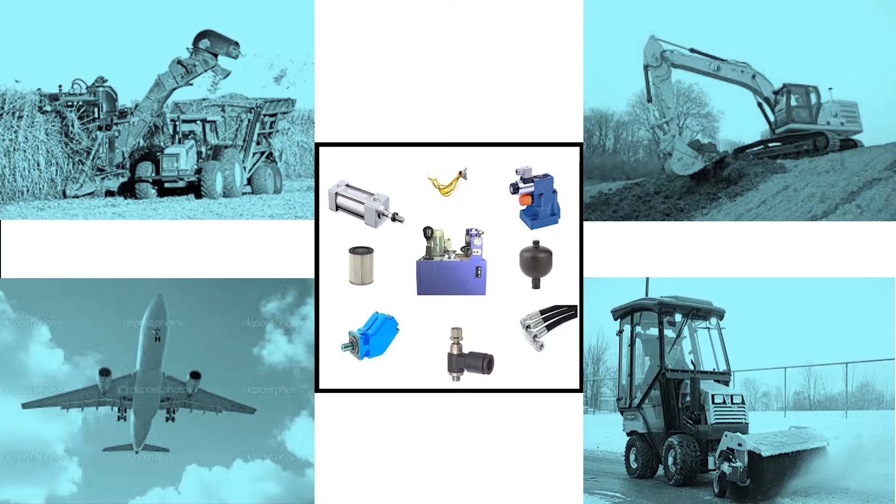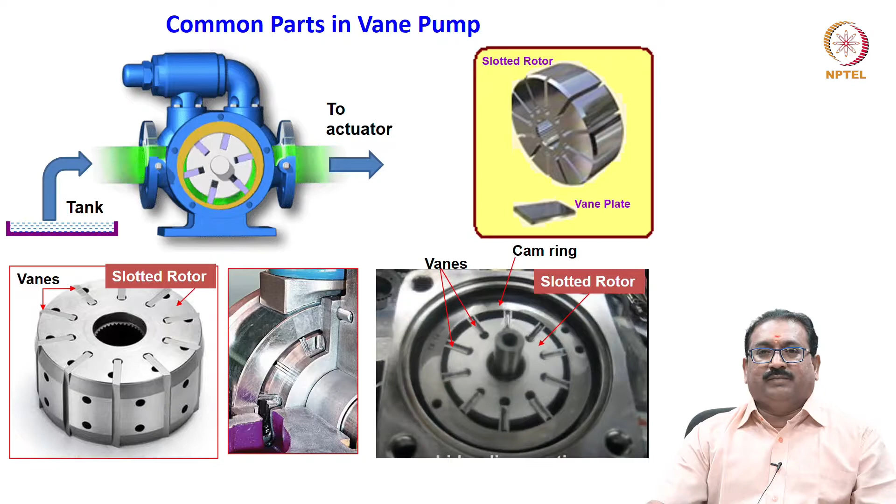What are the three important parts? Slotted rotor, vanes and cam ring. These are the important parts in the vane pump. Let us see one by one.

Variable displacement, unbalanced vane pump is what we are discussing now. It basically consists of a rotor which contains radial slots, splined to the drive shaft, and rotates inside a cam ring.

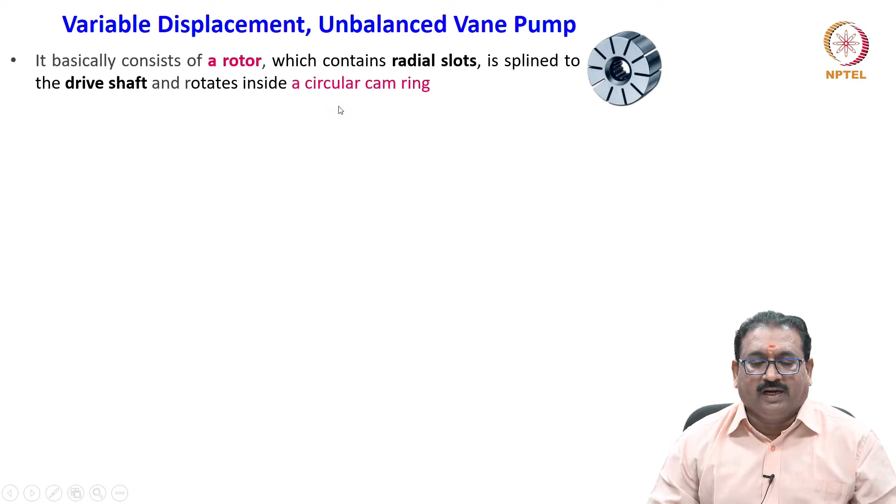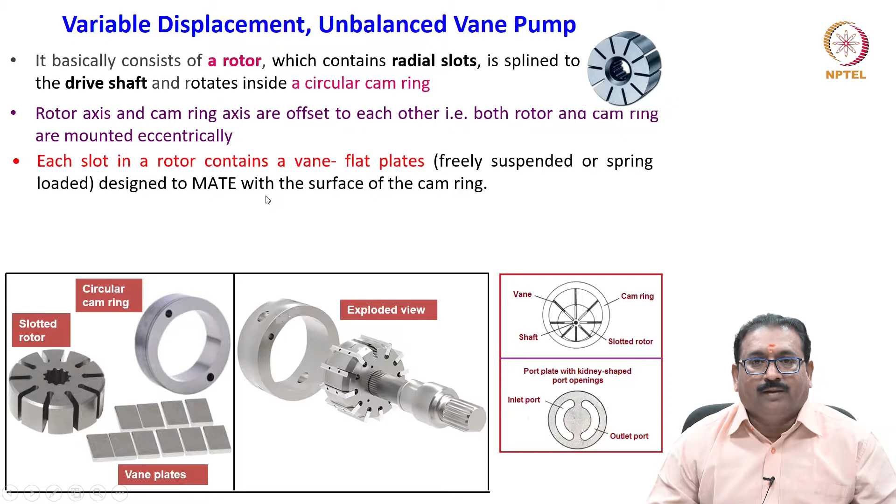Each slot in the rotor contains a vane, which are flat plates, as I have told you, either freely suspended or spring loaded. They are designed to mate with the surface of the cam ring. During operation, they will mate with the surface of the cam ring.

As the rotor rotates, the centrifugal force keeps the vanes out from the rotor slot against the surface of the circular cam ring, forming a positive seal. You will see here when the rotor starts rotating, the vanes are thrown out and they mate with the surface of the cam ring. This seals the oil, carrying it in the pockets from the suction to the discharge.

Then, when the vanes reciprocate, how does it work? You will see here the port plates. The port plate has kidney shaped port openings - this is the inlet port and this is the outlet port.

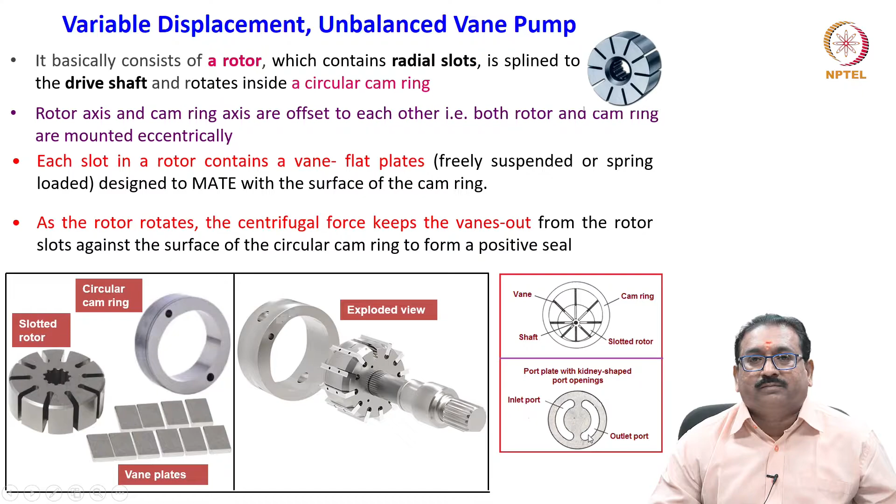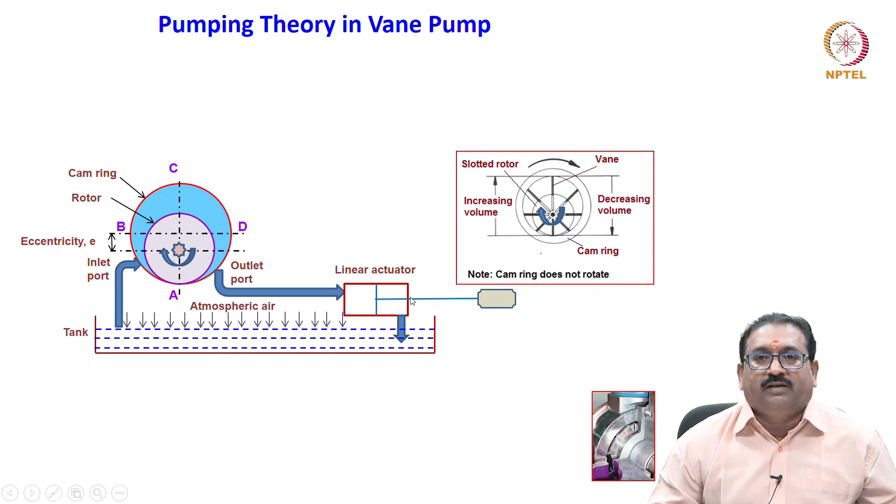Now we will see the pumping theory in a vane pump, how the fluid is transported from the tank to the actuator side. Let us see, as we know, as the rotor rotates through half a revolution, what happens?

The volume increases between the rotor and the cam ring. So the resulting volume expansion causes a reduction in pressure at the inlet of the vane pump, known as the suction pressure or vacuum pressure, which causes the fluid to flow through the inlet port and fill the void.

You will see friends here the schematic diagram. This is the rotor, rotor axis, cam ring, and cam ring axis. For better understanding of the pumping theory, I have not shown the vane here.

You will see here when the rotor rotates, the increasing volume - observe here A, B, C, this area you will see the volume increases in the half revolution of the rotor. This increasing volume creates a partial vacuum at the inlet beginning.

Once the fluid is caught, it is transported to the other side on the next half revolution. What happens? You will see in this area the volume decreasing. So, as the rotor rotates through the second half of the revolution, the surface of the cam ring pushes the vanes back into their slot and the trapped volume is reduced.

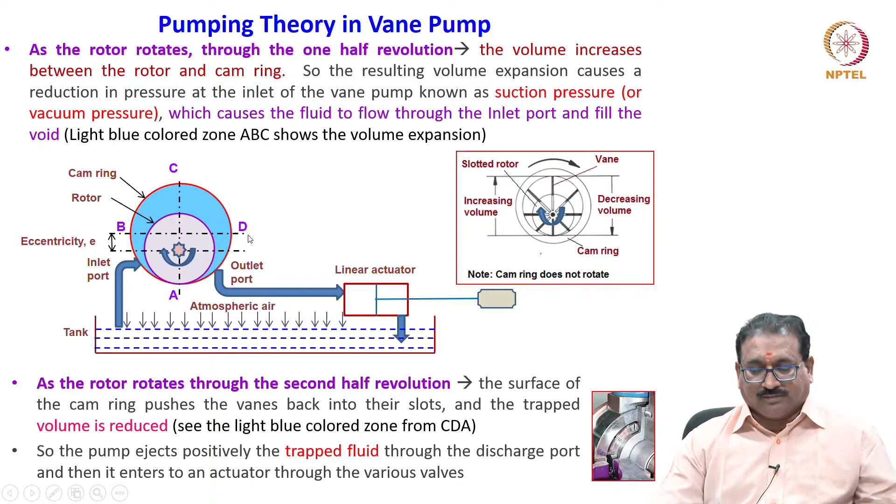Let us quickly, I will show you here, same thing. Here you will see friends, the increasing volume, that is why oil enters in this region. Then what happens? Oil is carried around the cam ring and pumping chambers, these are the chambers, what I have marked here. Also you will see friends, the vane will seal, positive seal.

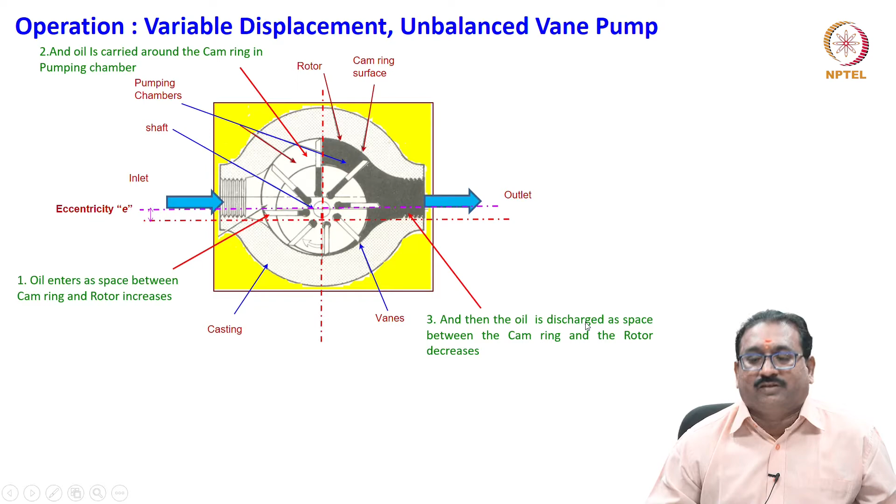Vane will throw out and it will come to the surface of the cam ring. Then oil will be carried. Then here the volume decreases. What happens? Then the fluid is discharged from the port, the inlet port, outlet port.

When this eccentricity, what I have shown here, is 0, then what happens friends? No increasing volume, then only it will recirculate, no discharge you will get. That's why when eccentricity is 0, the oil will simply recirculate without affecting any discharge.

But as the eccentricity increases, the flow also increases. Please note, the direction of flow is determined by the direction of eccentricity. I will explain this in the next slide.

You will see here friends, when the rotor axis and cam ring axis coincide with each other, meaning 0 eccentricity, no flow, because no increasing volume or no decreasing volume. All volumes are same. But you will see here, when I am giving the eccentricity, here I am giving maximum eccentricity E max,

that time you will see one half, the volume increases. Another half rotation, volume decreases. Meaning always there is an eccentricity between the cam ring and the rotor axis. Meaning there is a provision to make this E variable in the variable displacement pump. In the fixed displacement pump, E is fixed.

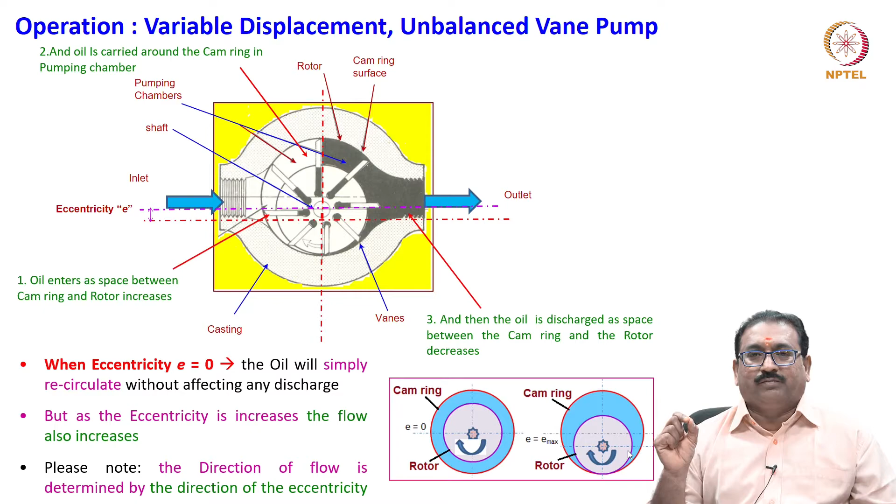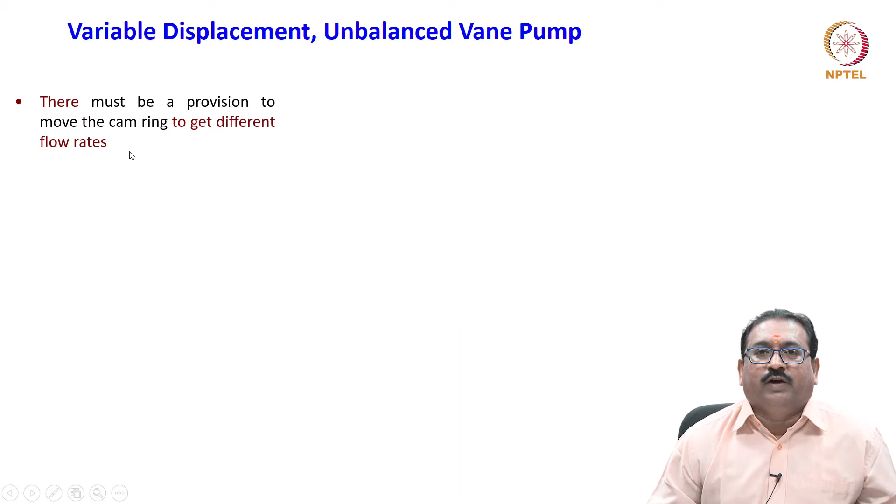Now let us see, there must be the provision to move the cam ring to get different flow rates. A hand wheel or a pressure compensator can be used to move the cam ring in relation to the rotor axis.

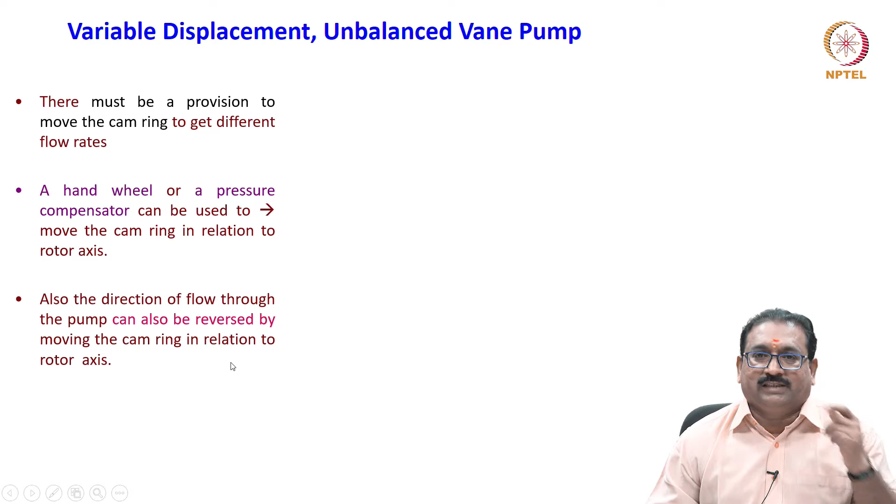As I have told you, the direction of flow through the pump can also be reversed by moving the cam ring in relation to the rotor axis. I will show you the simple sketch here. See friends here. Please see the suction port and discharge port and the direction of movement of the cam ring. Here the cam ring I moved from the center of the rotor to the right side.

Then what happened? When it will rotate, the volume increases, that is why it is a suction, then it will carry it and discharge to the outlet. But if you will move the cam ring to the left side, you will see now I moved to the left side.

That time what happened? When the rotor will rotate, this volume, half of it, goes on increasing. That is why suction is here and discharge is here. Please note friends, if E increases, flow rate increases. Also, which direction you are moving the cam ring will matter to decide which is the suction side and which is the discharge side.

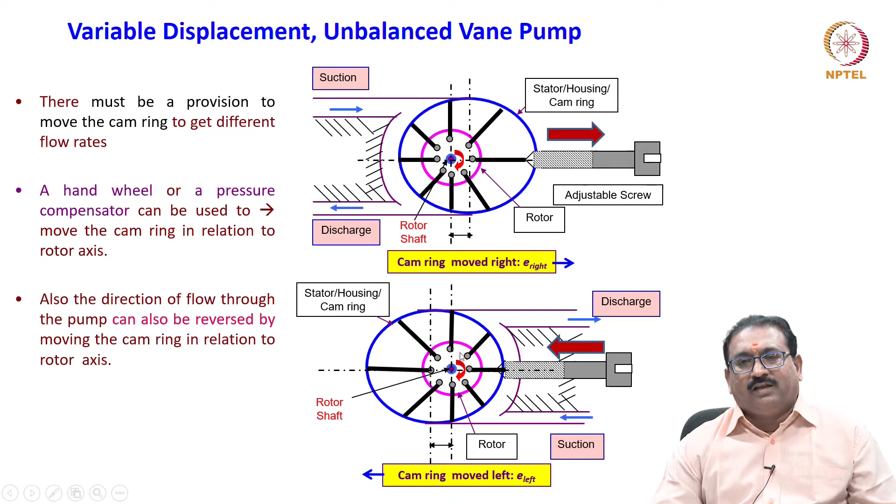Which is the suction side and which is the discharge side? The movement of the cam ring is very important for two things. If E is increasing, flow rate is increasing. In this figure, if you are moving to the right side, suction is here because volume increases in this direction. If you move here, the volume increases in this direction when the rotor rotates.

Now you will see, friends, in the vane pump these are the three important parameters: the cam ring, slotted rotor, and the vanes. The slotted rotor and the cam ring are eccentric to each other to get the flow.

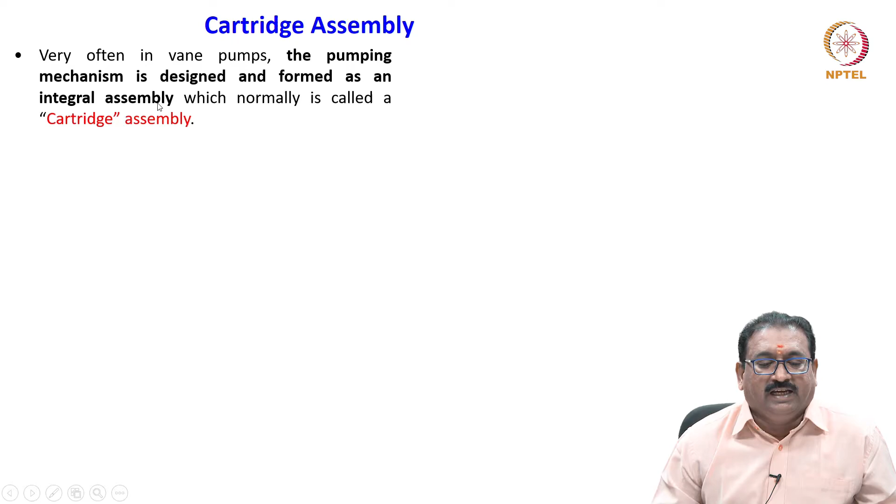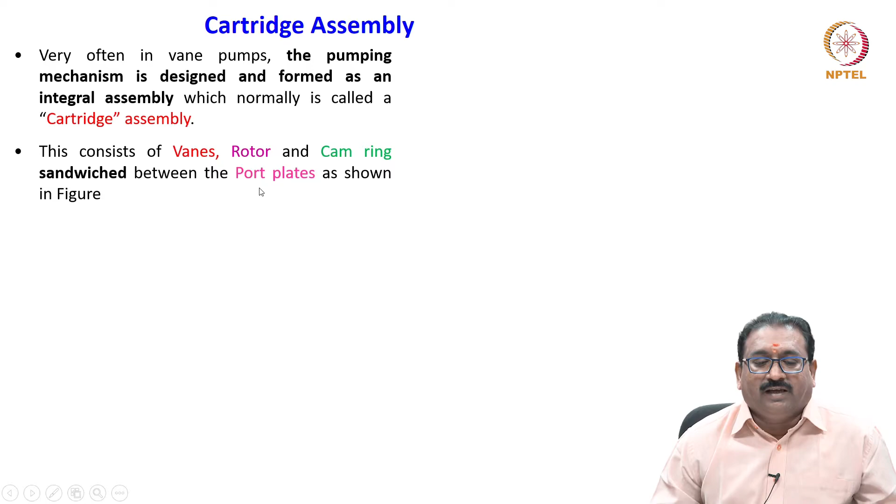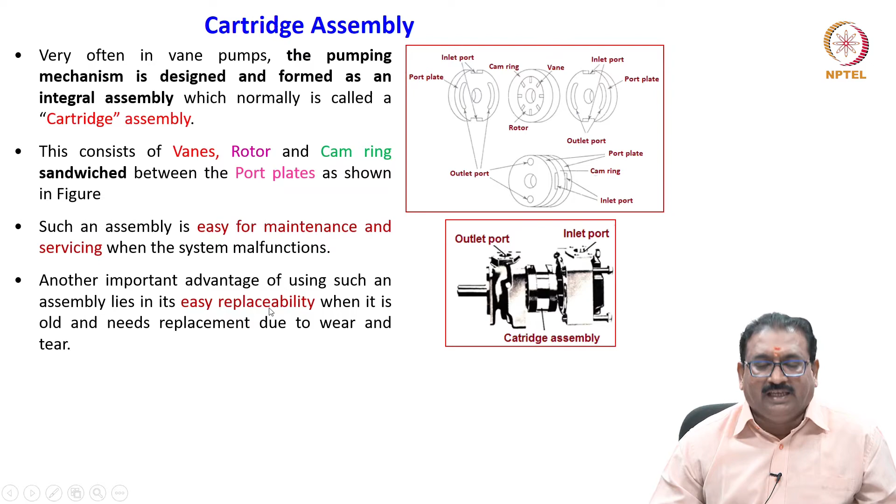Such an assembly is easy for maintenance and servicing when the system malfunctions. Another important advantage of using such an assembly lies in its easy replaceability when it is old and needs replacement due to wear and tear. A new cartridge assembly can easily be fitted in place of the old one, which can then be sent for servicing if needed.

Another advantage is that while fitting the new cartridge, the pump volume can be increased or decreased by using a cartridge having identical external dimensions but changing the internal dimensions to suit the current and anticipated pumping requirement, if needed. That is another advantage when using the cartridge assembly.

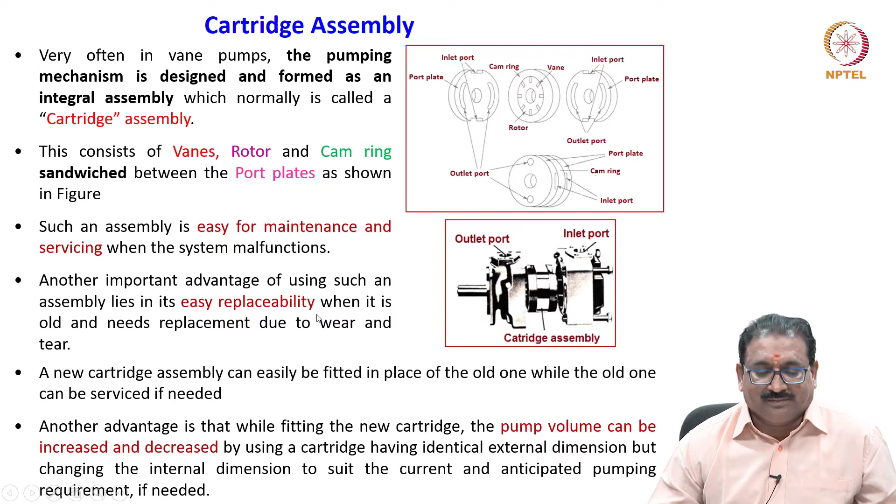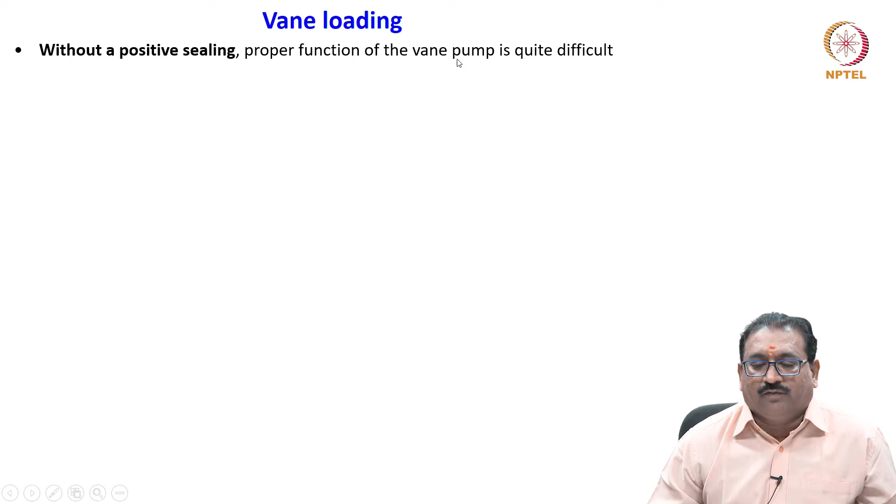Now we will see the vane loading. The vane loading is very important because when the vanes are thrown out, we require positive sealing from the vane to the cam ring surfaces. Without positive sealing, proper functioning of the vane pump is a difficult task.

So generally, the vanes are displaced from the slots by the centrifugal force as soon as the rotor starts rotating, achieving a positive seal. That is why designers prescribe that the minimum operating speed of vane pumps should not be below 600 rpm.

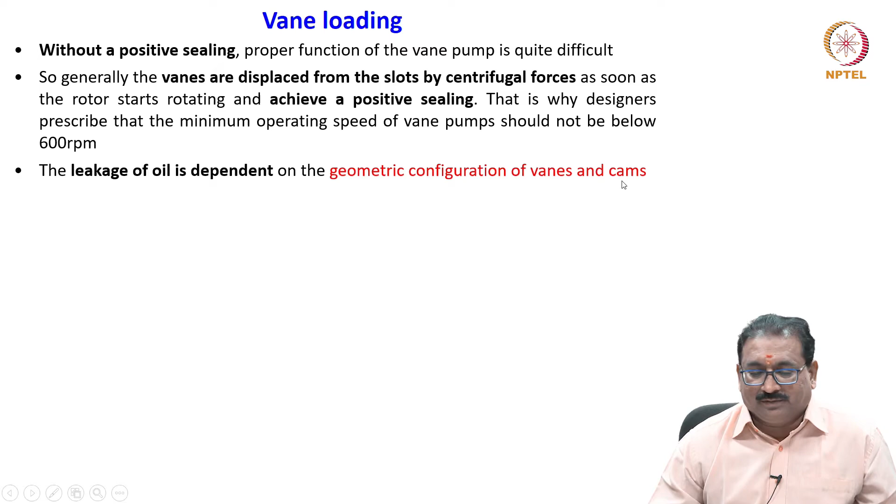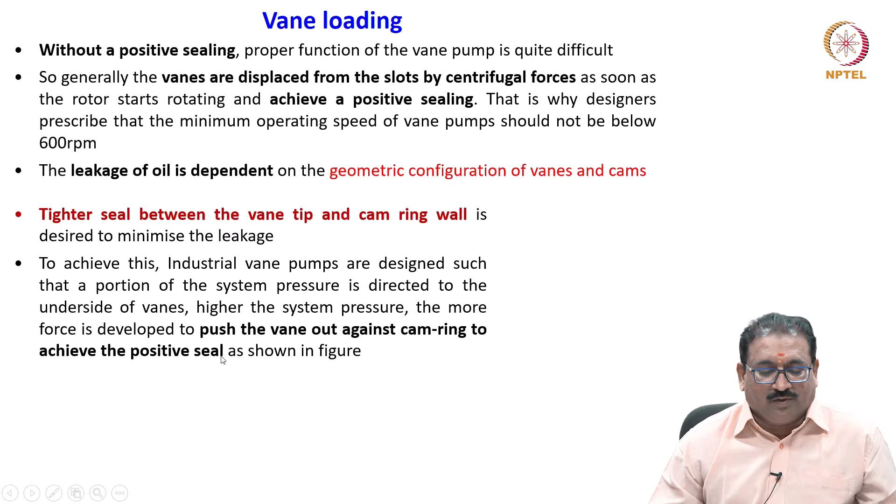The leakage of oil depends on the geometric configuration of the vanes and the cams. A tighter seal between the vane tip and the cam ring wall is desired to minimize leakage. To achieve this, industrial vane pumps are designed such that a portion of the system pressure is directed to the underside of the vanes. Higher the system pressure, more force is developed to push the vane out against the cam ring to achieve positive sealing, as shown in the figure here.

What they will do, friends, is since these vanes are freely suspended in the slot, to make the positive seal they use a small portion of the system pressure at the underside to push the vane and make a perfect seal between the vane and the cam ring. You will see here the system pressure will push here and make a positive seal here.

This hydraulic loading, meaning loading the vane, develops a tighter seal, but with too great a force between the vane and cam ring, it would wear excessively, and the vanes would be a source of drag, causing the pump to malfunction due to mechanical failure of the pump parts. This scoring action is more pronounced if the vane has a straight rectangular cross section, as shown in the figure here.

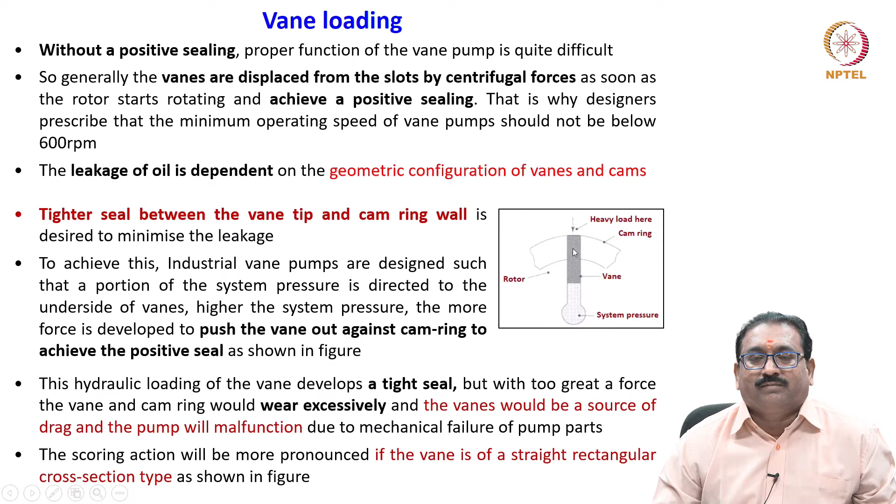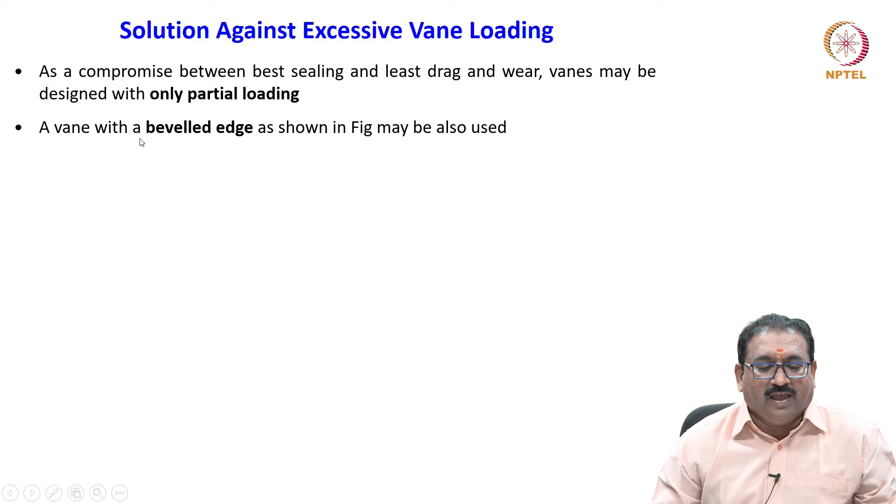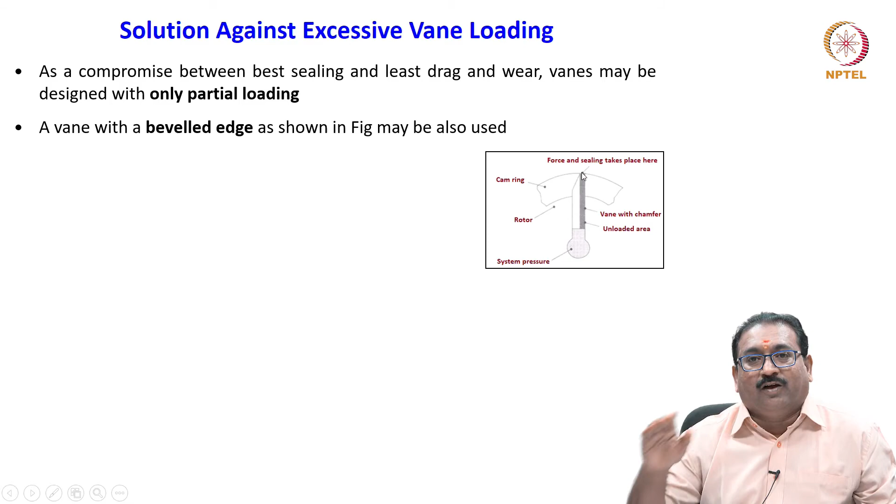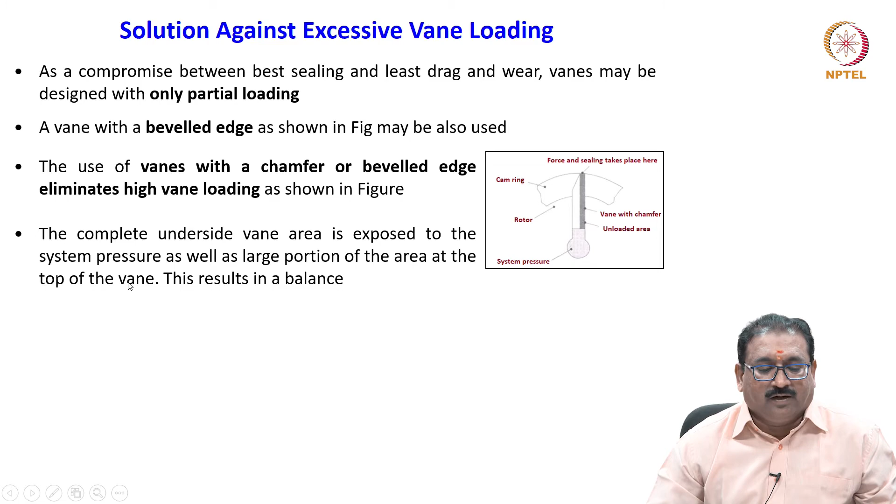Meaning the force and sealing takes place here, previously a larger area. The use of vanes with a chamfer or beveled edge eliminates high vane loading. The complete underside vane area is exposed to the system pressure, as well as a large portion of the area at the top of the vane. This results in a balance.

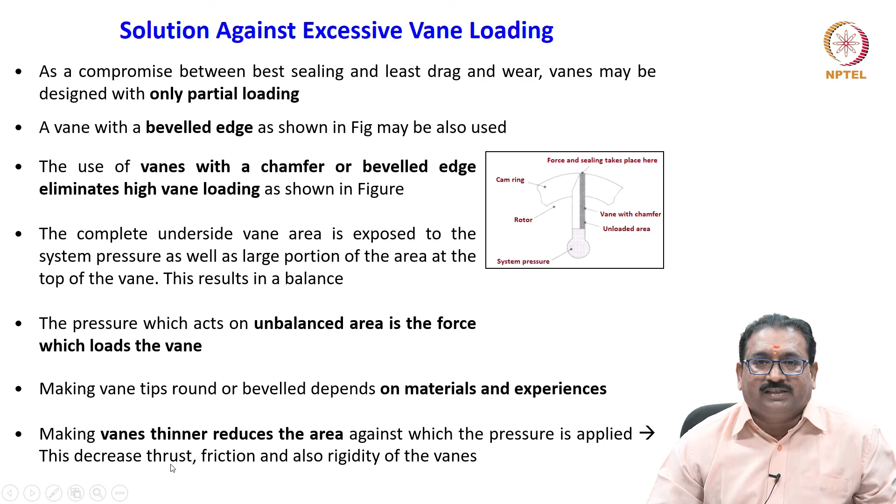The pressure which acts on the unbalanced area is the force which loads the vane, making the vane tips round or beveled depending on the materials and experience. Making vanes thinner reduces the area against which the pressure is applied. This decreases thrust, friction, and also the rigidity of the vanes.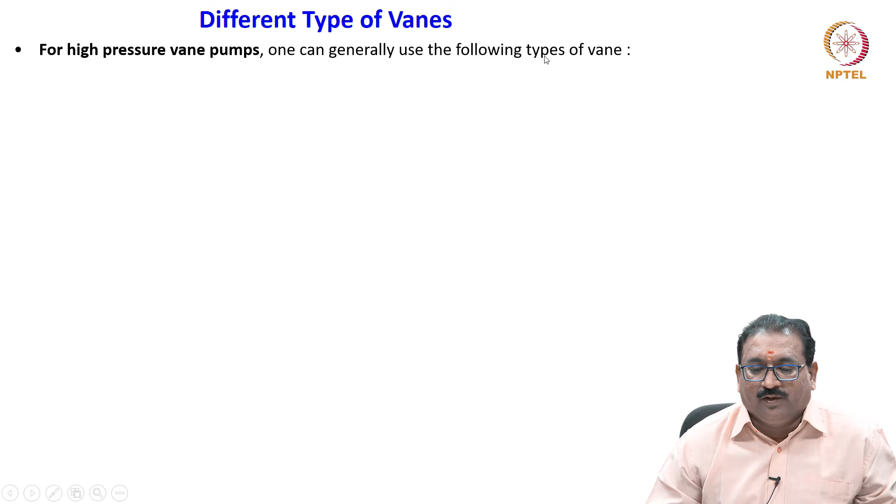Now we will see quickly the different types of vane designs used during operation for positive sealing. For high pressure vane pumps, one can generally use the following types of vanes.

First, a dual vane. The figure is shown here. What is this dual vane? As the name suggests, it consists of two vanes in each slot of the rotor. With this arrangement, the vane is considerably balanced with a possibility of positive sealing. See here, the system pressure we are sending is available here, the two vanes in each slot.

Next one is the intra-vane. What is this? It consists of a smaller vane within a larger vane with a beveled edge. The delivery pressure from the pump is directed above the smaller vane, resulting in less loading.

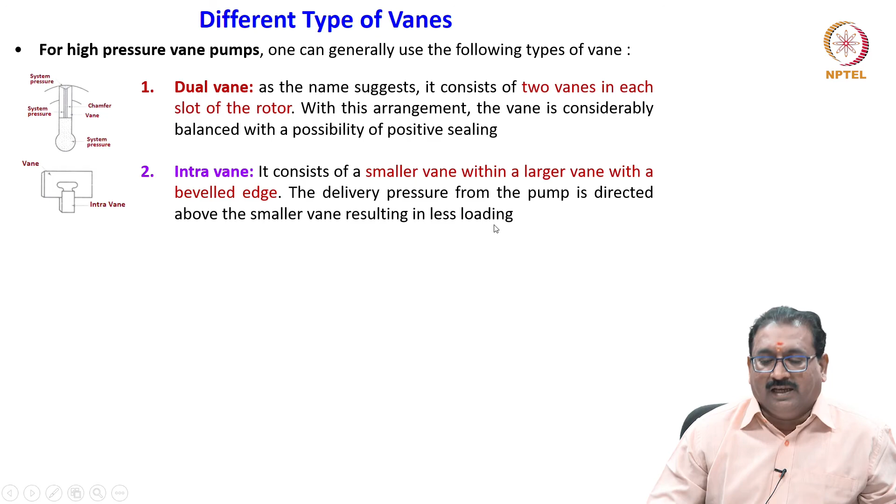Then the pin vane. What is this pin vane? Similar to the intra-vane design, in a pin vane the delivery pressure is directed underside of the pin, which forces the vane out against the cam ring surface.

Or you may use spring-loaded vanes also, as I have told you. Here a spring is used to force the vane against the cam ring along with the system pressure. You will see here: they fit the spring and the vane, and also use the system pressure.

Another one is the angular vane. Here the vanes are positioned at an angle in the rotor. You see here, this may reduce the loading on the vane without any mechanical means.

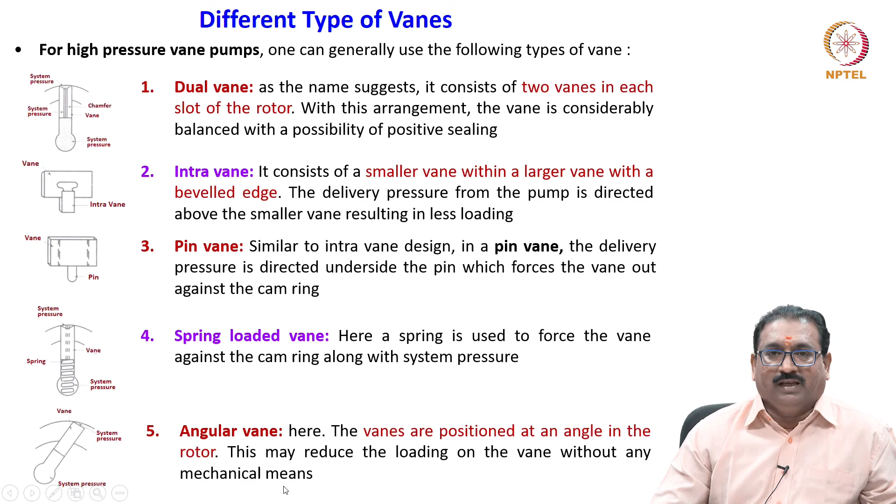Now, quickly we will see how to arrive at the volumetric displacement, theoretical flow rate, and volumetric efficiency in case of the vane pump, if we know the geometrical features of the vane pump. Let us consider the main parameter here, the cam ring. I am showing you the cam ring and the rotor.

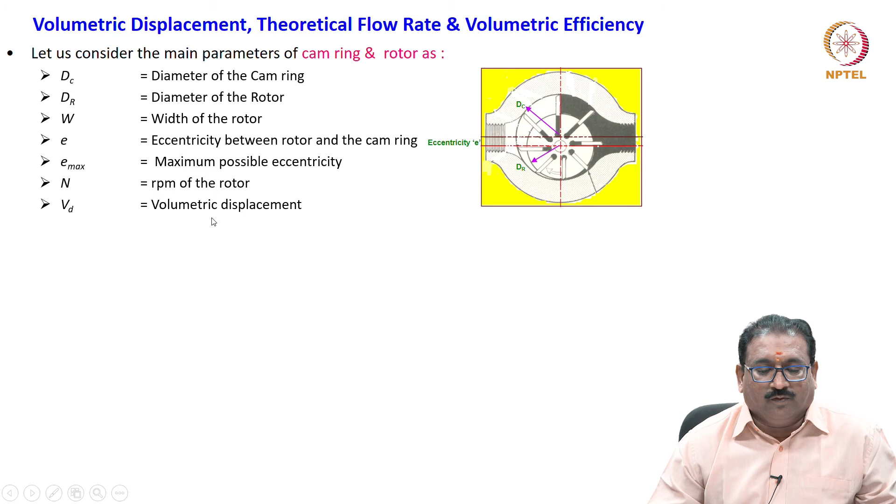What I have marked here: DC is the diameter of the cam ring, dr is the diameter of the rotor, W is the width of the rotor, E is the eccentricity between the rotor and the cam ring, Emax is the maximum possible eccentricity, N is the RPM of the rotor, Vd is volumetric displacement, Vd max is the maximum possible pump displacement. From the geometry, we can find the maximum possible eccentricity, Emax equal to DC minus dr by 2.

This maximum eccentricity produces a maximum volumetric displacement, given by pi by 4, DC square minus dr square, into the width of the rotor. Now, rearranging the term, we have pi by 4, separating into two terms: DC plus dr, and DC minus dr, into W.

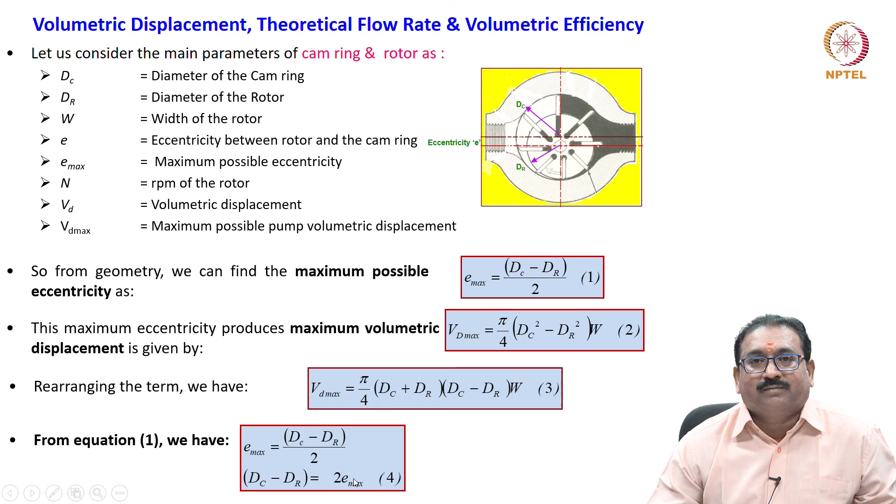Then from this equation, what is DC minus dr? DC minus dr equals 2Emax. Substituting this DC minus dr here in this equation, what is the Vd max? Vd max equals pi by 2, DC plus dr, into Emax, into W.

For the fixed displacement pump, Emax is constant. Then it is given by pi by 2, DC plus dr, into E, whatever the eccentricity, into W. Theoretical flow rate Qt is determined using the expression Vd into N, since we already know how to calculate Vd. Once we know this, the actual flow rate is calculated using the volumetric efficiency, since the theoretical flow rate depends on Vd into N: Qa equals volumetric efficiency into Qt.